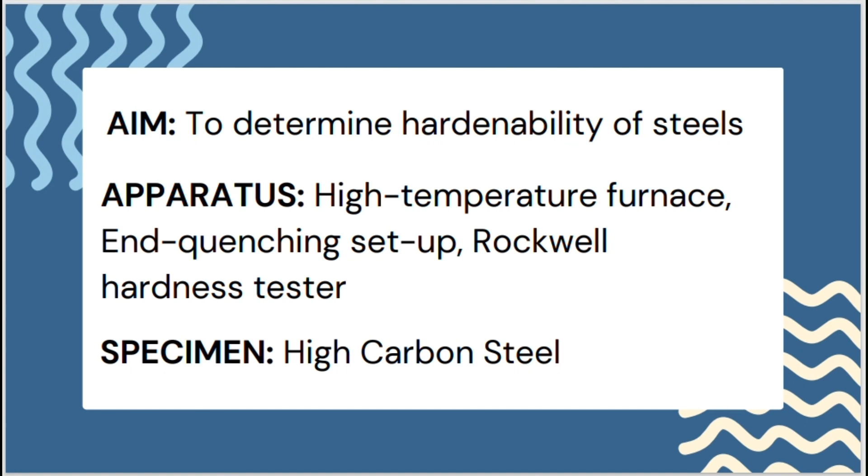The aim of the experiment is to determine the hardenability of steels. The apparatus used are high temperature furnace, end quenching setup, and Rockwell hardness tester. The specimen used is high carbon steel. This is the flowchart of the procedure.

We take room temperature steel, which is of BCC structure, body centered cubic. It is heated in a furnace to a temperature of 800 degrees centigrade. At this temperature, austenite is formed, FCC, face centered cubic structure. Austenite ranges from a temperature of 727 degrees centigrade to 1493 degrees centigrade. Hence, we choose a temperature of 800 degrees centigrade.

After this, austenite form of steel is taken out of the furnace and quenched. Quenching is rapid cooling by immersion in oil or water or only air of a metal object from the high temperature at which it has been shaped. Therefore, austenite is water quenched and air quenched. One side is water sprayed, which is water quenched, thus forming martensite of BCT structure, body centered tetragonal.

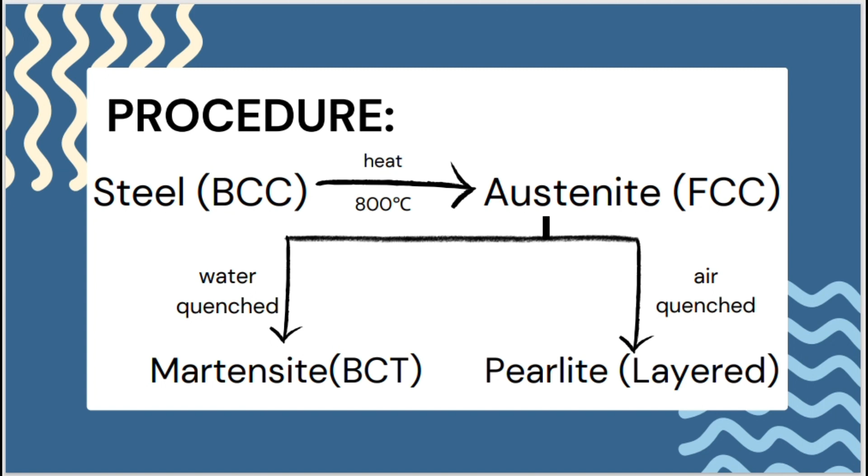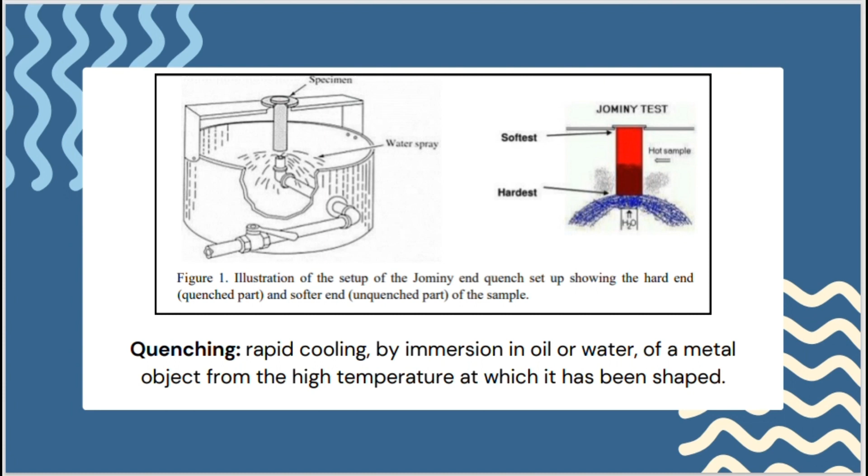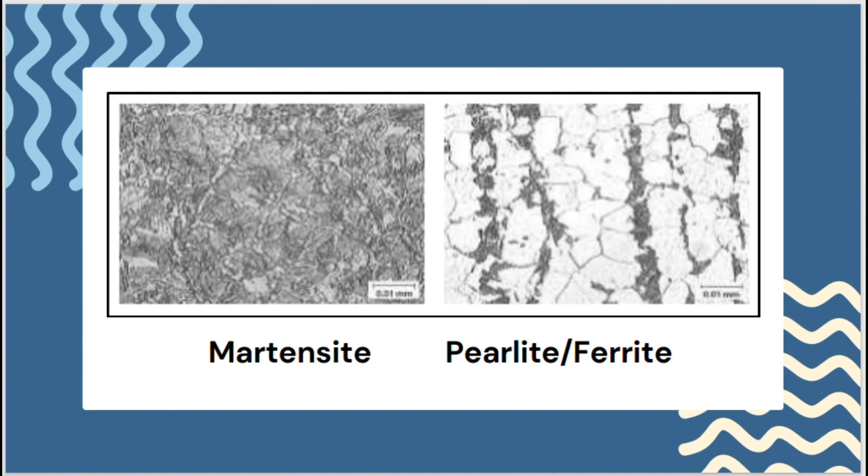Here we can see the body centered tetragonal crystal structure of martensite. This is a picture of micro level structure of martensite and pearlite. Now we need to test the hardness of the specimen quenched. So we use the Rockwell hardness test. The principle of this test is that a standard load is applied through a standard indenter for a standard duration of time. The hardness number is directly obtained from the instrument.

But what is hardness? Hardness of a material is defined as the resistance to permanent indentation, penetration, or deformation under static and dynamic loads. So, for example, a steel of high hardenability can transform to a high fraction of martensite to depths of several millimeters under relatively slow cooling, such as an oil quench, whereas a steel of low hardenability may only form a high fraction of martensite to a depth of less than a millimeter even under rapid cooling of water quench.

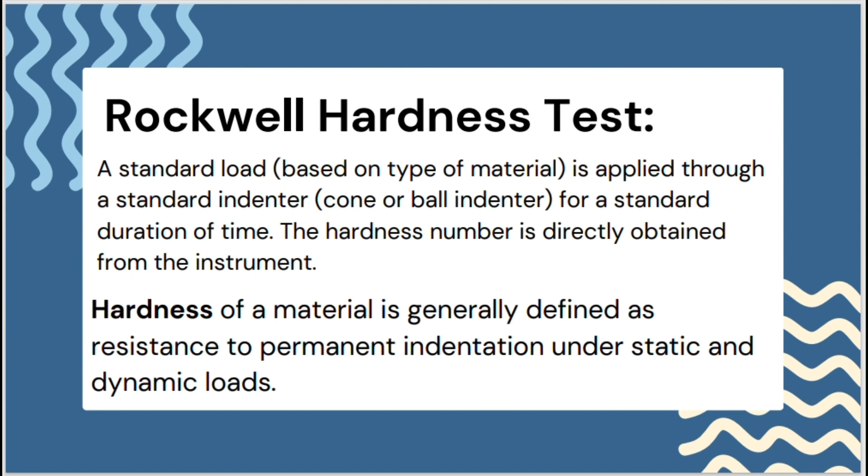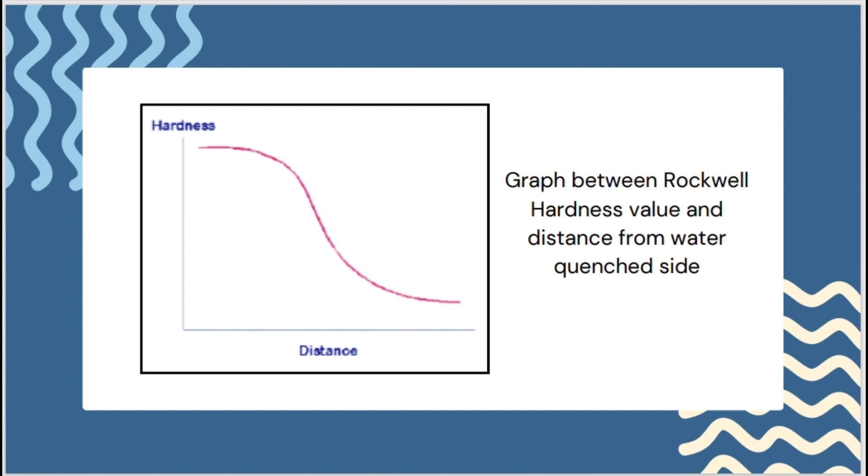But why exactly does it form martensite? This is because the carbon atoms do not have time to diffuse out of the crystal structure in large enough quantities to form cementite, which is Fe3C. Here we can see that the hardness value of the water quench side, which forms martensite, is higher than pearlite, which is a relatively softer side, and hence this is the graph we obtain.

Some other important specifications are that the specimen of high carbon steel is of cylindrical shape, having diameter 25 mm and length 100 mm. Ramp is 10 degrees centigrade per minute. This denotes that every minute the furnace temperature raises itself by 10 degrees. Dwell time is 60 minutes, indicating that once the furnace reaches its final temperature, it will be at the constant temperature for that amount of time. And the final temperature here is 800 degrees centigrade. So put together, it means that once the furnace reaches 800 degrees centigrade, it will be at that constant temperature for 1 hour.

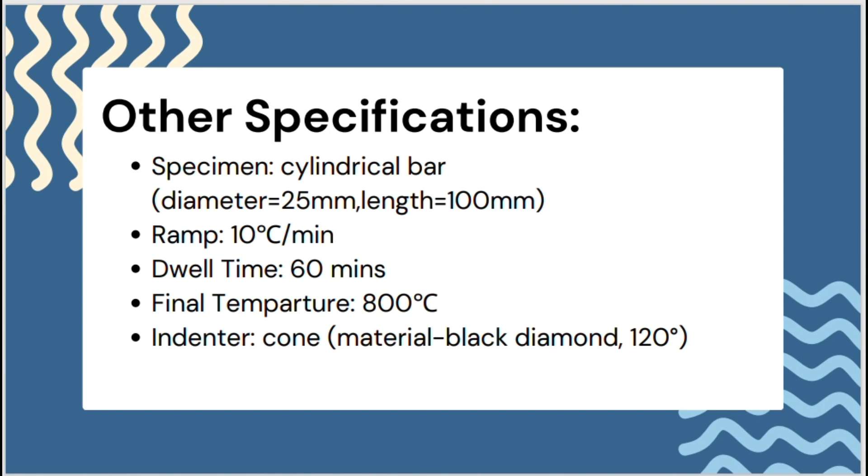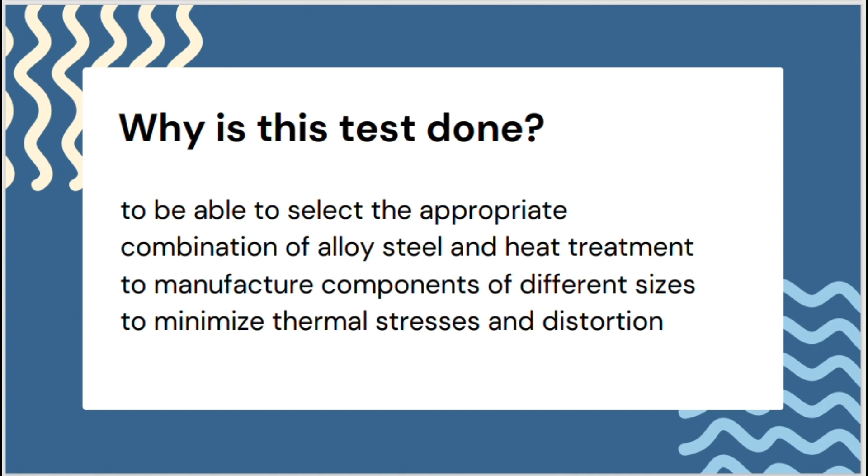The indenter used in Rockwell hardness test is of cone shape of 120 degrees and made up of black diamond. And why is this test important? It is to be able to select the appropriate combination of alloy steel and heat treatment to manufacture components of different sizes to minimize thermal stresses and distortion.